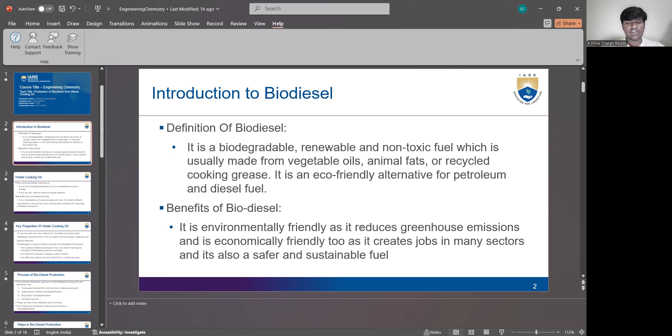Coming to the waste cooking oil. Why recycle waste cooking oil? Because it is environmentally beneficial as it is a renewable source of energy. It can also be used to make bio-based plastics. Benefits over conventional fuels. It's renewable, so it saves energy and cost, and it is highly cost efficient and highly energy efficient too. Government also provides tax incentives for recycling of waste cooking oil.

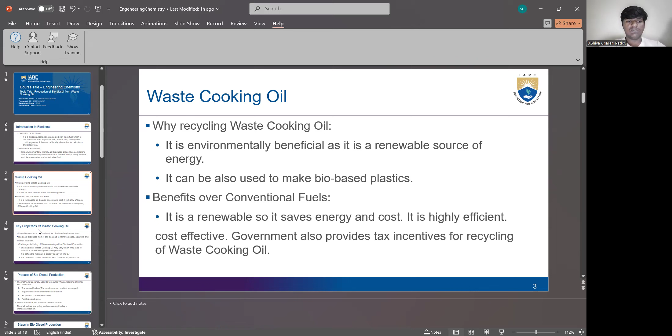Government also reduces the tax and gives some incentive to the products which we will create from the waste cooking oil. Key properties of waste cooking oil. It can be used as a raw material for biodiesel and many fuels. Biodiesel produced from it can be used to remove soaps, catalysts, and alcohol residues.

Challenges in using waste cooking oil for biodiesel production. Quality of waste cooking oil may vary, which may lead to disruption of the biodiesel production process, because of gathering waste cooking oil from many different areas such as hotels and restaurants. The different food which is cooked in that oil may vary, so the impurities may vary too. So this may disrupt the biodiesel production process.

It is difficult to maintain a steady supply of waste cooking oil. It is difficult to collect and store the waste cooking oil from multiple sources because by mixing it, you may increase the impurities and it may disrupt the process again.

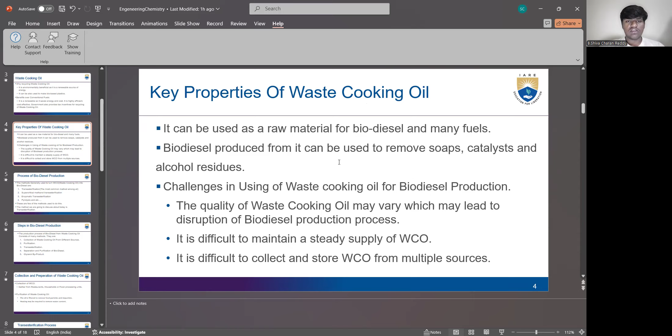And regularly getting the supply of waste cooking oil is also a hard part, because the gathering of cooking oil may take a large amount of time, because there are different types of cooking oils, and gathering them all, trying to maintain a steady supply and trying to recycle, it's a very large process. So it can't be done that easily.

And coming to the process of biodiesel production, the methods generally used to turn waste cooking oil into biodiesel are transesterification, which is the most commonly used method among all other methods, and supercritical methanol transesterification, which is an updated method of transesterification, and enzymatic transesterification, in which enzymes are used to

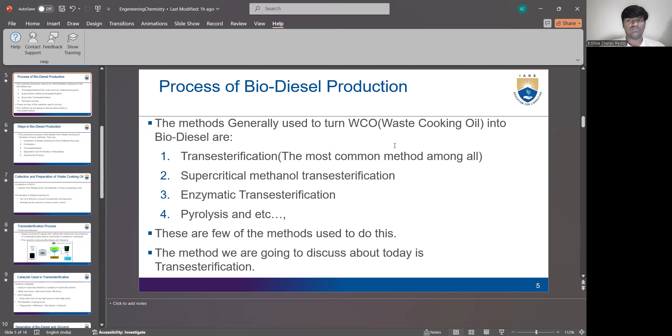do the transesterification process. And pyrolysis, and there are some more processes which are not commonly used. These are the most commonly used ones, and among all of these, transesterification is the most used one, and that's the one we are going to discuss today.

Steps in biodiesel production. The production of biodiesel from waste cooking oil consists of many steps. They are collection of waste cooking oil from different sources, as we talked about earlier, collecting them and storing them separately. Purification, purifying this waste cooking oil collected all together.

And transesterification, then separation and purification of the biodiesel formed from transesterification, separating the impurities from it and purifying it to get pure biodiesel. Glycerol. Glycerol is a byproduct produced from transesterification, and we separate the biodiesel and glycerol, which are combined when the transesterification occurs.

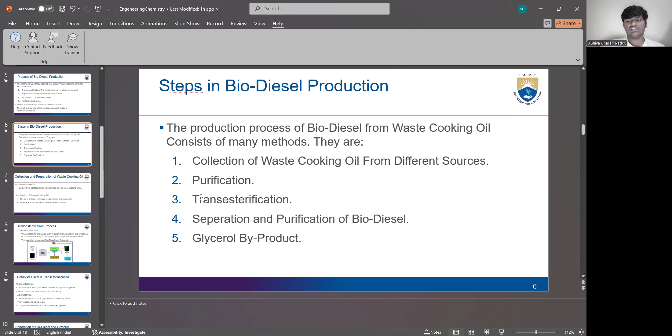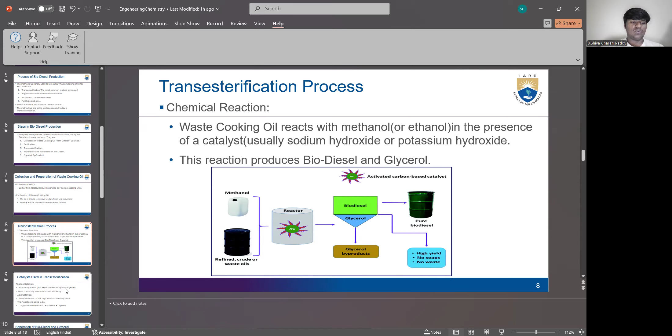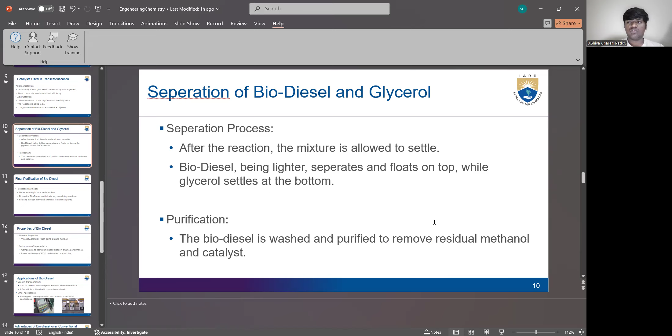Coming to separation of biodiesel from glycerol, the separation process. After the reaction we discussed, the mixture is allowed to settle. Biodiesel is lighter than glycerol, so it floats, while glycerol settles at the bottom, and then they are both separated. The biodiesel is washed and purified to remove residual methanol and catalyst, which were added.

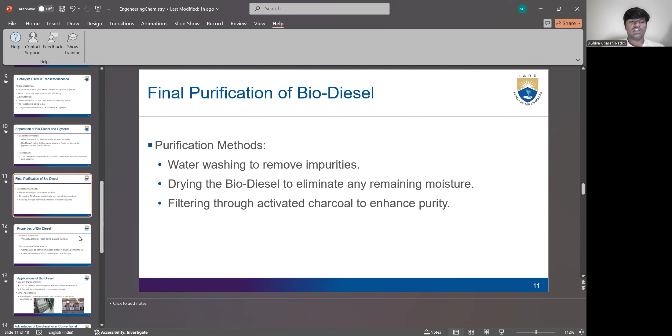Purification methods: water washing to remove impurities, drying the biodiesel to eliminate any remaining moisture and water content, and filtering through activated charcoal to enhance purity. After getting the biodiesel by drying and removing the entire water content, filtering it through the activated charcoal increases purity and also increases the quality of the biodiesel.

Properties of the biodiesel. The physical properties are viscosity, density, flash point, and cetane number, which are general to all fuels. Performance characteristics are comparable to petroleum-based diesel in engine performance. So it is as good as non-renewable resources, but it's a renewable resource, so it's economically friendly too, and it's good for the environment and ecology and personal uses because it doesn't consume too many

resources because it's recycled. Lower emissions of CO2, particulates and sulfur, because it's a recycled product. It doesn't emit too much carbon dioxide, particulates and sulfur, which helps us protect our environment and reduces pollution around us.

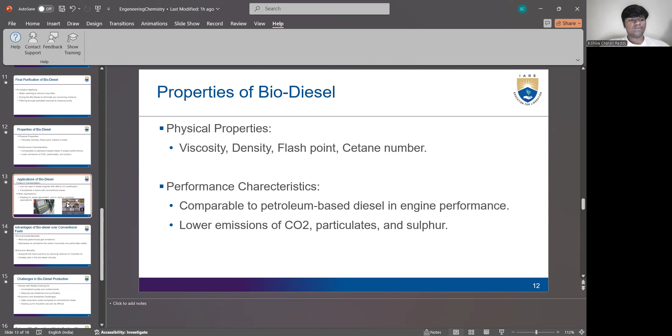Applications of biodiesel: uses in transportation. It can be used in diesel engines with little to no modification, conventional diesel engines, which are mostly in cars and trucks, so biodiesel can also be used in them. It's a substitute or blend with conventional diesel; you can interchange the two fuels, like using conventional diesel on one trip and biodiesel on the return trip.

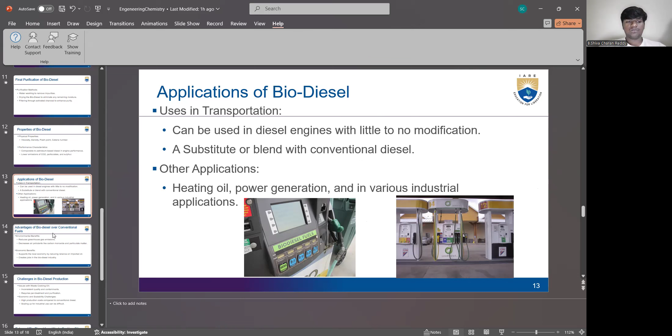Other applications: you can also use biodiesel for heating as heating oil, or for power generation. You can use it in generators and in various industrial applications. Advantages of biodiesel over conventional fuels: as we talked about earlier, it reduces greenhouse gases and decreases air pollution like carbon monoxide or particulate matter, which reduces the pollution around us significantly.

And if we can manage to convert the petrol fuels we use to biodiesel, we can reduce the pollution content in our air by a significantly large amount. Economic benefits: it supports the local economy by reducing reliance on imported oil.

So it can make our economy stable and give us a source of energy which can make us strong in terms of energy resources, and is also a very supporting thing to our economy, and it also creates many jobs in the biodiesel industry because there are many processes in making this, such as collecting the waste cooking oil from many places, processing it through the entire transesterification process, delivering it to the consumers and reaching it out to the vehicles, etc. So it can also give many jobs for unemployed people, which may help in creating a large scale industry.

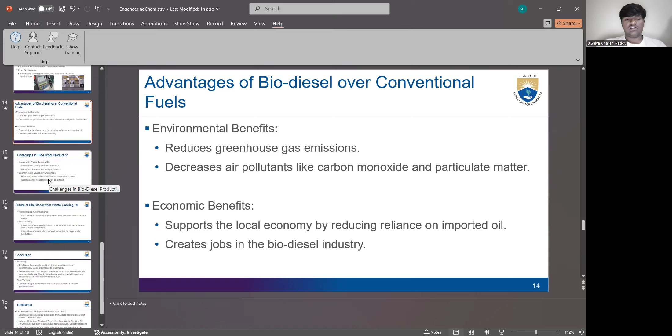Challenges in biodiesel production: issues with waste cooking oil, inconsistent quality and contaminants because of the cooking oil being collected from many places. The different amounts of items cooked in the oil may vary, and the impurities may also vary because of all of them combined, which may lead to inconsistent quality and many different sorts of contaminants which may not be removed as easily by filtering through the entire oil. This requires pre-treatment and purification in large amounts, which may not guarantee the purification of the cooking oil.

Economic and scalability challenges. High production costs compared to conventional diesel. This is true because when you are purchasing the waste cooking oil, transferring it, processing it through a factory, doing all this process and delivering it, it's definitely gonna cost more than diesel, because diesel is a direct product and this is a recycled product. So due to all these processes and the additional cost of the biofuel, it may require a large amount of money, but not too expensive compared to conventional diesel. But yeah, the cost is gonna be high.

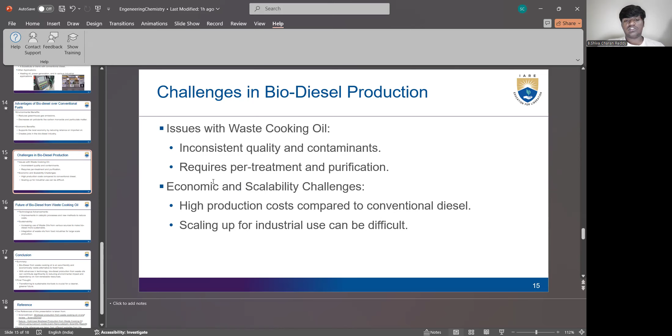Scaling up for industrial use can be difficult. So due to this high production cost, many people may not be interested to produce the biodiesel. Future of biodiesel from waste cooking oil. Technological advancements: improvements in catalytic processes, and new methods to reduce costs. Sustainability: increasing use of waste oils from various sources to make biodiesel more sustainable. Integration of waste oils from food industries for large-scale production.

Because of using these waste oils from various sources, you can try to make the oil more sustainable by storing it at different warehouses, and when the stock is low you can bring out the oil from other warehouses, so this can make the sustainability easier, and you can collect and store the stock whenever needed. Integration of waste oils from food industries on large scale production. You can make a deal with the food corporations which make food in large amounts, sign an exclusive deal with them and take the waste cooking oil for yourselves for recycling.

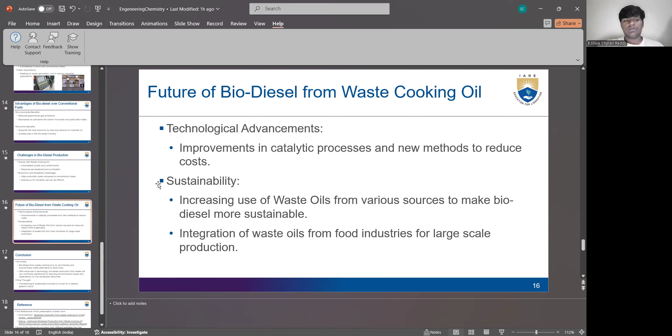And coming to the conclusion of the presentation, biodiesel from waste cooking oil is an eco-friendly and economically viable alternative to fossil fuels. Because it's an eco-friendly alternative, it's obviously better than diesel, but it's also somewhat economically viable because it may lead to a huge revolution in industry. It reduces pollution. It's also equivalent to a fossil fuel, so it may reduce our use of non-renewable resources, which are currently mostly used, which may increase our energy sources and also reduce our reliance on fossil fuels.

With advances in technology, biodiesel production from waste oils can contribute significantly to reducing environmental impact and dependency on non-renewable resources. As I just talked about earlier, it may reduce our dependency on non-renewable resources. So, with advancing technology, rather than using non-renewable resources, we should switch to renewable resources such as biodiesel, which may help conserve our non-renewable resources for our future generations. My final thought on this presentation and this process is transitioning to better, sustainable, recyclable biofuels is crucial for a cleaner, greener environment for our future generations.

And the references I've taken are from these websites, Science Direct and Nature, and some of the references are taken from different websites on the internet.